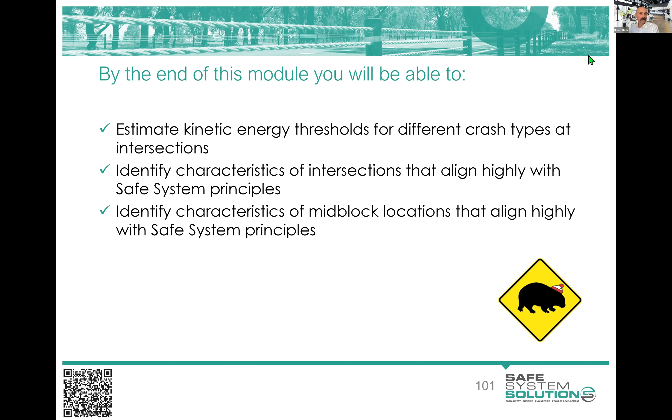The kinetic energy thresholds for different crash types, which we discussed. We started with the Usain Bolt analogy, which many are familiar with, and then we went a little bit further looking at different crash types. We're going to use that and dig further into it, and try to understand how we might make some assessments based on that. We'll do that for intersections, and for mid-block locations as well. So we'll really find out what aligns highly in the built environment for intersections and mid-blocks with safe system principles. Don't forget to count your wombats, of course.

Okay, so intersections are a really interesting, fascinating point on the road network, and they are a point of elevated risk. That's for a number of reasons. One, of course, is that we have conflict points. You can see here in our little picture we've got vehicles crashing. That's what a lot of people think of as an intersection crash, and certainly it is one. But we also have pedestrians who need to cross roads at this location, so we've got that conflict. We've got cyclists crossing and involved in those conflict points, motorcyclists as well.

We also have an increased run-off-road likelihood at these locations. Why is that? Because people will avoid or clip vehicles before they crash, so we have this increased turbulence at these areas of the road network, with people leaving the road to avoid a crash. And we also have a lot of fixed hazards around intersections. In this one you can see a signal pedestal, a fixed hazard, but we'll also often have power poles at intersections because the power line needs to turn, so you've got to have a pole there. Often culverts at intersections for drainage reasons. So we see a lot of roadside hazards at intersections.

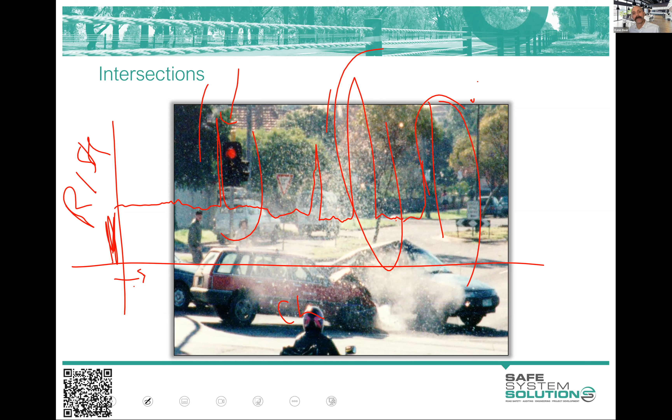So Monash University Accident Research Centre at one point tried to say, what are some high-level principles for good intersection design that align with safe system principles? I think it's worth thinking about this very high-level stuff first before we delve into specific detail. They started out with fewer vehicles and fewer intersections. Now, think about what we ended last session with, which was exposure times likelihood times severity or consequence, which is risk.

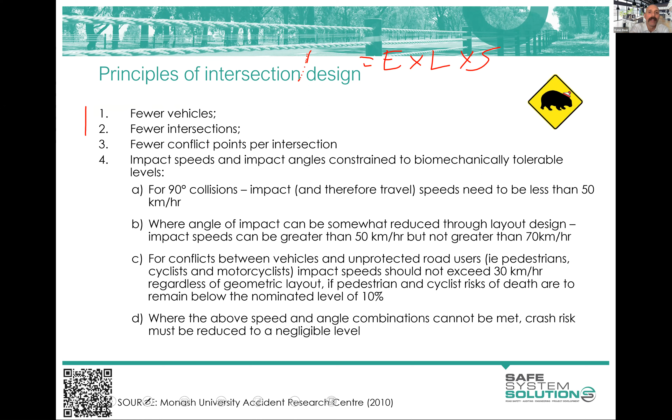These two are associated with exposure to crashes. If you eliminate an intersection, you've eliminated the exposure at that location. Now, yes, the vehicles might go to another intersection, so you may increase exposure there, but at that particular one we've eliminated the exposure. And fewer vehicles means less exposure under this exposure, likelihood, severity thinking.

Fewer conflict points per intersection. Now we're into likelihood. So a conflict point is just a way that you can crash. And I'll show a conflict point diagram. Some of you will know conflict point diagrams intimately, but it's just less possible ways to crash. Often people want to bring this in as an exposure reduction in a safe system assessment, but we put it to a likelihood reduction. I'll explain sort of why that is later.

Then we're into these impact speeds and angles for passenger vehicles, trying to get them inside those biomechanically tolerable levels. And so these ones, again, are in these generic ones of 90-degree crashes, 50 kilometers per hour or below. You can get a bit more angle on that.

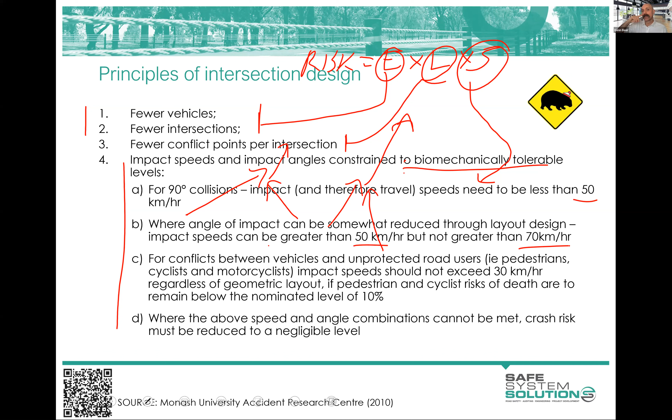So remember your year 11 vectors: if you've got a crash that happens like that, only a small amount of the energy goes into the environment. But if you crash like that, you push more energy into the environment, sort of bounce off a bit. So if we can get a bit more angle on our crashes, we can go somewhere between 50 and 70 kilometer per hour crashes within our tolerable levels.

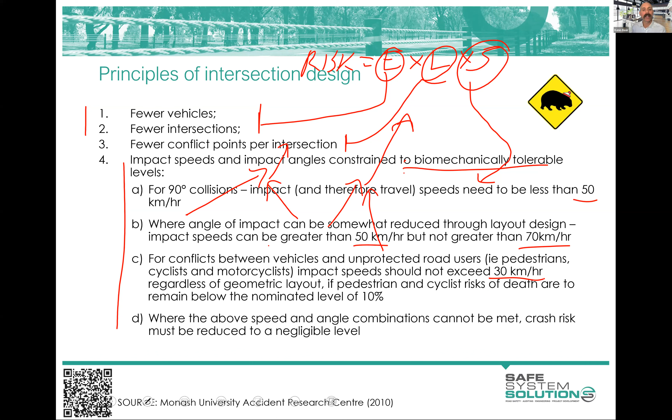Pedestrians and cyclists, thinking about them, we're into the 30 kilometers per hour or below. And if we can't be reaching these, we need to reevaluate how we're operating that area and see if we can make some fundamental changes.

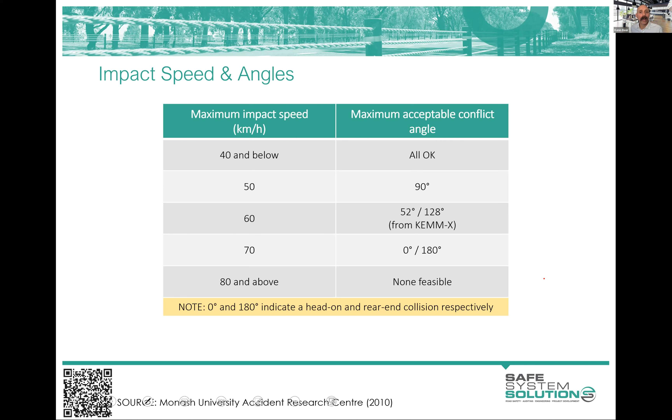Last session, I was showing quite a few of these impact speeds and angles for passenger vehicles mainly. And then we talked a little bit about pedestrians and cyclists and got some newer motorcycle data in there as well. So I won't spend too much time on that. But when you're doing a safe system assessment, you're going to be thinking about the angles of crash. Now, you don't need to be this precise, although your designers can easily spit out an angle if you want.

But for this, I'd be saying, okay, new intersection coming. Let's have a think about the angles. And I go, okay, a vehicle coming out here, being struck by a vehicle here, that's close enough to a right angle. So then I'd be thinking, well, what speed are we hoping that should be? We're thinking 50 kilometers per hour or below.

And they come out here. Okay, what about over here? And I'll say, oh, that angle, they've got more on it. I'd be more inclined to be thinking around the 60 kilometers per hour or below for that side, which would probably be within our general safe system tolerances.

So there are reasonably sophisticated tools you can use. There's one called KEMM-X, the kinetic energy management model, but that's far beyond what you would ever need to do for a safe system assessment. If you're doing some sort of very in-depth study of an intersection and forces and the like, you might dig out some of those tools to use.

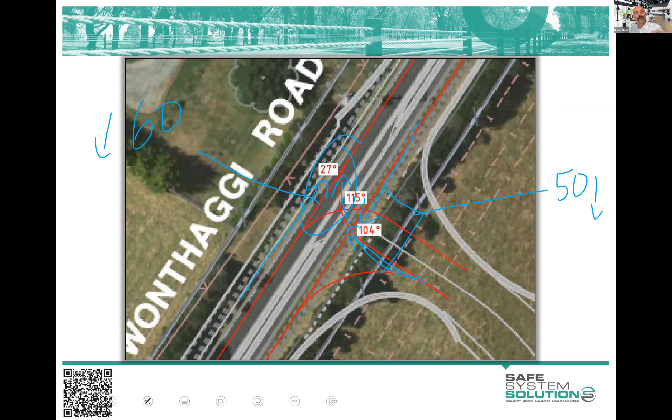But generally, because a safe system assessment is that risk assessment methodology, it's sort of broad brushish, you can simply make a judgment call on this based on: that's the angle, that's the speed, that's what we know from the science, and generally this is where we're going.

We also want to think about the secondary crashes, and I alluded to that with those run-off-road crash increases around intersections. So you have these vehicles avoiding crashes and running off the road. You have the two vehicles colliding and then they both leave the road, and you have secondary crashes.

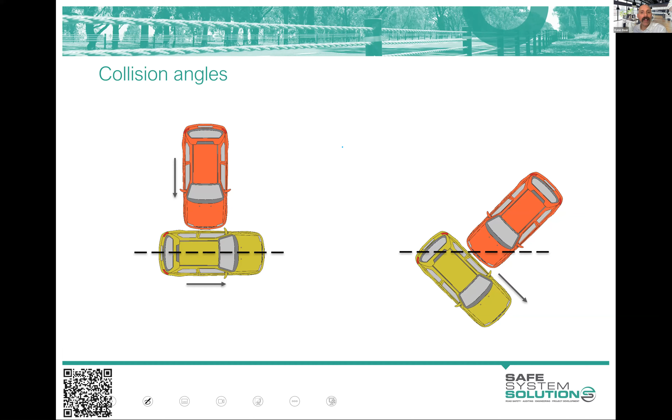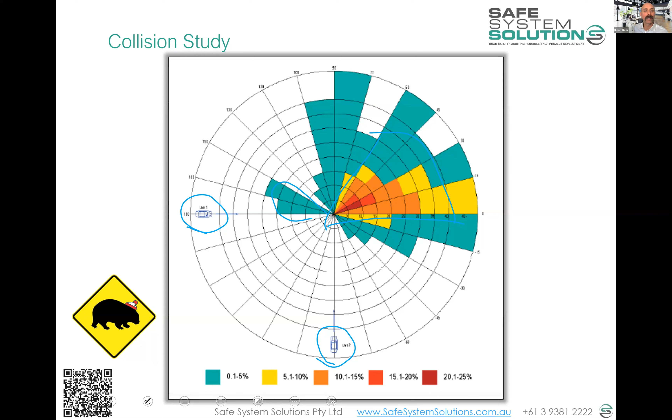So Kathy, I reckon that's enough talking out of me. Well, I'm going to give an introduction into this little exercise, and then I'm going to give people some time to do some thinking and come up with a few ideas.

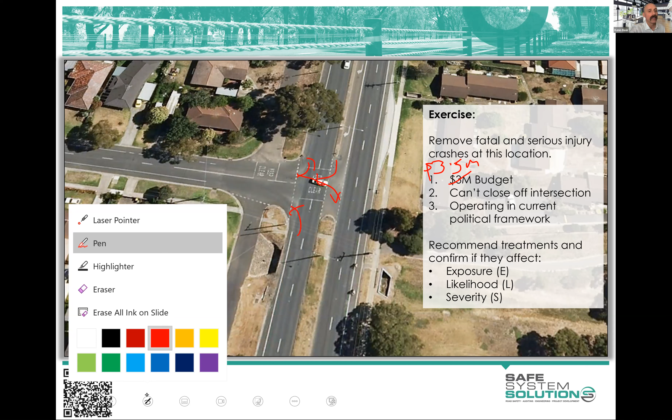What else? So you're operating also in your current political organizational framework. What do I mean by that? Well, if you're going to propose something extreme, you're going to have to give us a little bit of help here in getting that through the system. So some ideas on how we might work that through the system if you're going to something a bit extreme.

Now, some of you are probably going, well, I don't know how much things cost. How do I know what would 3.5 million get? Well, this is where I am going to assist as the instant cost estimator tool. So if you need a cost of something, just type it in and say cost. So you might say, how much for a grade separation flyover? And I would say $42 million. You're not going to afford it.

Amazing, Ken. You can do that instantly. Instant cost estimation. Jeez. Okay. Great. All right. Well, can I kick us off?

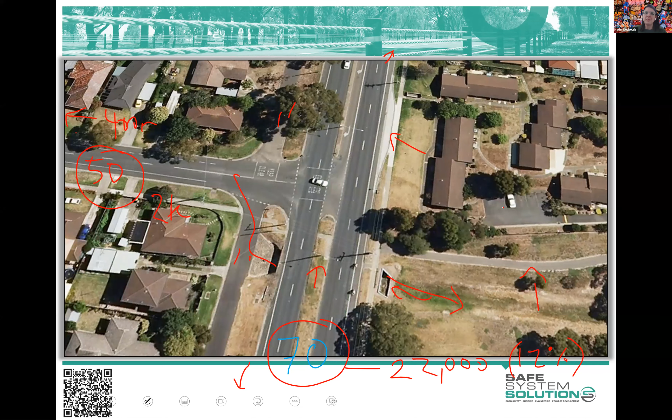So somebody wants to know what type of fatal and serious injury history. Interesting question. Okay. Wondered if anybody would ask that. So the crash history. Give a prize? Yeah. Okay, give a prize, because I'm up for prize giving.

I'm always a little bit hesitant to drive a lot of stuff by crash history. I mean, that's the way people have operated for a long time. These days, it's not a great predictor of future death and serious injury. But anyway, this one's got crashes involving vehicles crashing like that, and vehicles coming out and crashing like that. So that's our crash history, and I think there were six serious injury crashes, no fatals, all involving passenger vehicles, except one, which was a motorcyclist.

Okay, now just recapping, price for a roundabout, that was in the $7 or $8 million mark, is that right? Right. What about a price for a continuous footpath treatment on the service road? Continuous footpath treatment on the service road. So continuous footpath, I assume meaning like across there. Yeah, we'll do both. 40,000, 50,000. Drainage will work quite well there, so you don't need to do a huge amount.

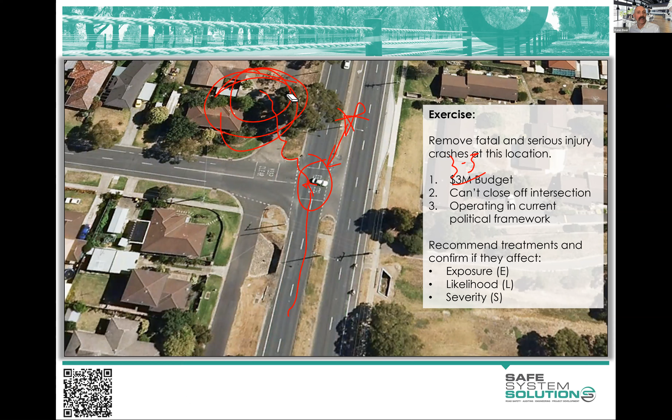All right, I think that's probably enough time, Kathy? Definitely. I'm just going to erase that. And I'm going to have a look at what we've got here when these wonderful people have come up with their ideas. Sorry, I'm jumping around the place here. Okay. Here we go.

So I like the fact that people very quickly were starting to ask, what's a roundabout cost? And people were quite interested in this roundabout idea, and I've got some slides to explore why maybe people were thinking about that. And we had lots of people thinking about different things, and then we started delving into, okay, let's go to the exposure, likelihood, and severity.

And we had some people asking, well, can we block off bits and pieces of this? Can we close the whole intersection? And I clarified, in this occasion, we can't, but that would definitely reduce the exposure to crashes. It would eliminate the exposure to crashes involving vehicles coming out and being struck. It wouldn't change our exposure to pedestrians crossing and being struck, because we'd have the same number of pedestrians crossing and essentially the same number of vehicles along here, but that intersection related crash would be down. So that is an exposure.

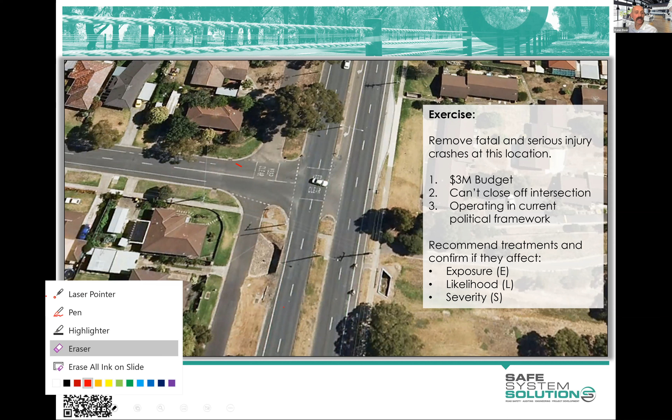So people wanting to close off the service roads, and then there's a little bit of confusion, it seems, as to what that helps us with. Does that help us with exposure or likelihood or severity? So really what we do, because of the relatively broad brush nature of safe system assessments, is say that would influence the likelihood of crashes. I think it would only be a very small reduction in the likelihood of crashes.

But nonetheless, the reason for that is that it's really not influencing the number of vehicles exposed to crashes at this location. That's predominantly done by the major volumes here and the major volumes here, and that's your crash. So coming out of here is going to cause a little bit of annoyance and turbulence and things here, but a minor number of increases in exposure to crashes, right?

So it might make things a little bit simpler, and that's all good. But all this is going to be happening at fairly low speeds, so I really don't have a huge amount of concern about that. It's when you've got vehicles coming through here at speed and things go wrong, that's our issue.

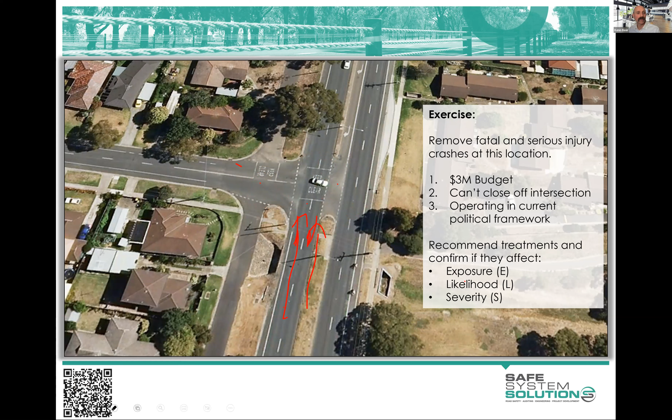Now, if you were to do a very, very refined safe system assessment, you could argue a change in exposure by closing their service roads. But essentially what you would have to do, and it would just be so weird for anybody to do this, but you technically could, is say, right, I'm actually doing all these different assessments. I'm doing an assessment here. So this will be assessment 1, this will be assessment 2, assessment 3, assessment 4, and assessment 5, 6 and 7.

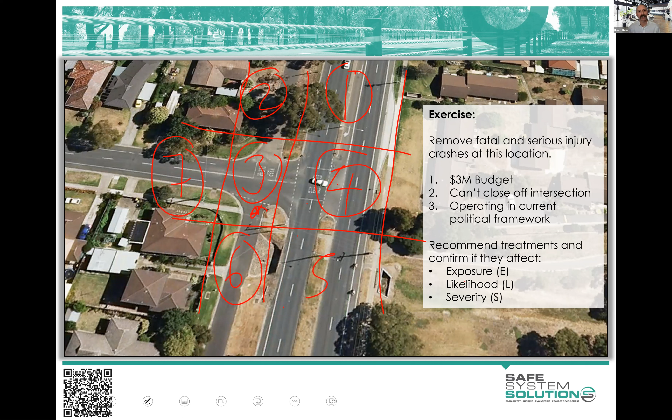And then you would say, well, for 3, we've changed the exposure to intersection crash types because they're at the intersection. But yeah, you wouldn't do that. It's just so much overkill for what we are doing with these assessments.

Okay, where were we? We were also seeing there, reduce the speed to 50 kilometers an hour. I'm not sure how we were going to do that. Speed limit reduction potentially for those doing it. And we've got some people now saying signalizing the intersection. A number of people have got to that point because they go, oh, we can't afford that roundabout we were thinking about. Okay, maybe we've got to go to signalization.

Now, some people want to move the bus stop. Okay, that's fine. So they're not liking the bus stop location close to this intersection, so maybe they're moving it down here potentially. And you do a bit of thinking about pedestrian desire lines, where people are coming from and going to, I'm sure, before you did that. But nonetheless, what would that influence? Exposure, likelihood, or severity? Well, that will influence likelihood.

You can't really say that this is going to influence the exposure to any crash type, because all the crashes that we were thinking about when the bus stop was here are still in our general vicinity. They're just happening down here. Be that a pedestrian crossing the road, be that the turbulence of the bus coming out and people going around it. So again, as long as we think, okay, our safe system assessment is of this whole area, that still exists.

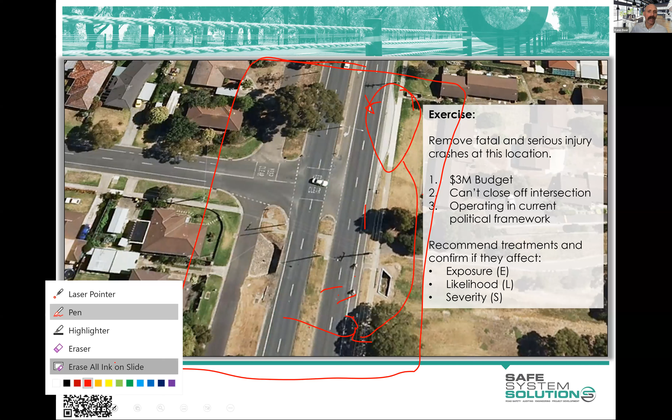Just having a look here. So then, interestingly, we've got some people talking about raised safety platforms and different raised intersections and raised bits and pieces. Now, that's interesting. So some people seem to want to raise things in this general area. And then we saw some people wanting to raise things out here as well. Okay, so that's quite interesting.

The reason I say that's quite interesting is because certainly 10 years ago, nobody ever would have been wanting to raise anything in that area. Why? Well, this is a fairly major arterial highway. It takes freight, buses, and you don't do vertical deflection on those, or that was the thinking. People would think about raising these threshold treatments and the like, and they have some advantage, but for that vehicle to vehicle crash type, really not too much advantage.

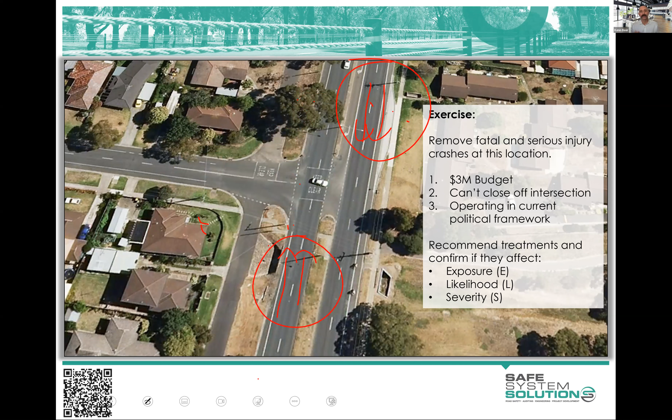They would have more advantage for pedestrians crossing at these locations, maybe slowing vehicles coming in, and certainly slowing vehicles coming out. But at a T intersection like this, the vehicles on the side road, well, they're not really the bullet vehicles, are they? They're not the ones doing damage. These vehicles are doing the damage. So they're the ones where we should be trying to address the speed to get it within what we're thinking about as tolerable levels for the crash types we're particularly focused on.

I'm just reading through, seeing there's lots of great responses, and I'm not going to get through them all. And I think we have to give a shout out to Anthony because he's detailed everything, including the cost for everything, and given us a total. And it's a bill of quantities at the end. Yes, yeah.

Good, excellent. Tell us, though, there are still many people in the industry that do not believe in devices such as platforms on major arterial roads. That's considered LATM, local area traffic management, to them. Yes, that's a very good point.

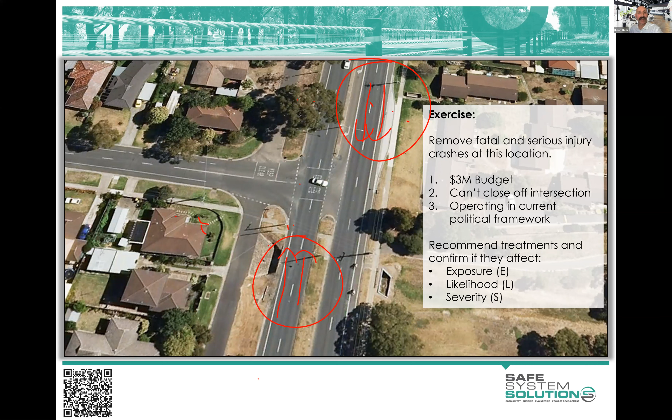That deserves a prize. And we're trying very hard to continue to get people educated and thinking, and there are lots and lots of examples out there of where it's been done and it can be done, and it's not the end of the world. And it's big change. Like, as I say, if I was in my VicRoads office 10 years ago and said, hey, why don't we do a raised intersection through here? I would have been kicked out of the office for sure, or laughed out of the office. But we're progressing now, but some areas are slower to progress.

But how do you get big change to happen? You show lots of examples, you show it can be done, you do trial areas and trial sites, and you move things forward. But let's have a look at some of this. And I suppose the other thing is that I've been running this course for a long time, about 7 or 8 years on safe system assessments, and nobody was interested in it for the first 5 years.

And we did these sorts of exercises though, we would get a group together and do these sorts of exercises. And with a group like this, I'd never get anybody who would say raised intersection. But now I get a good amount of people in every course suggesting that. And it shows that industry is getting progress. We're getting that thinking. People are understanding these things.

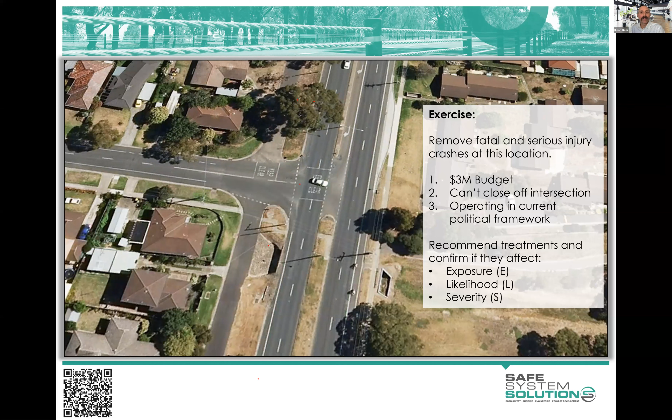And with a safe system assessment, you're starting to push people who don't have that thinking with these defined, somewhat official looking assessments. I'll talk more to that as well. But I'm going to run through a few slides, and I'm going to refer back to that intersection, and we'll come back to it a little bit later. But a lot of people did come to the conclusion that signalization, with the dollars we had available, was probably going to be what was needed of some description.

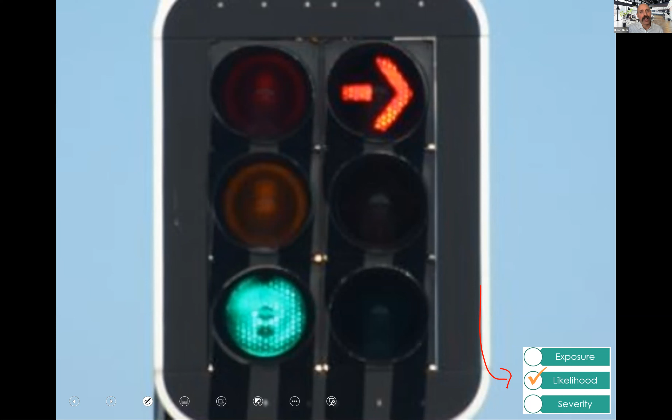And signals influence the likelihood of crashes. When we're doing safe system assessment, anything signalizing will influence the likelihood of crashes. Now, you probably have scenarios conjured up in your mind of where signals will reduce the severity of crashes as well. And yeah, for some crashes the severity will be reduced. Somebody will be braking late and it'll be a lower impact crash. But we are thinking about what is more likely to still remain, and that's high speed crashes of people running red lights and going through these signals.

The top 100 intersections for death and serious injury in most states will be absolutely dominated by large signalized intersections. And people just go, well, there's nothing more we can do here. People just have to stop running the red lights. This is now a behavioral issue, not our issue in the engineering of it. We've done our job. We've got to challenge that. We really have to challenge that.

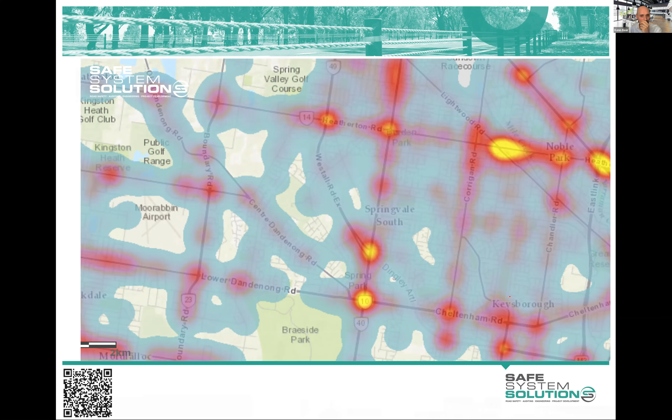In fact, Kathy, I'll show the next slide or two, and then I'm going to dig something out of my archive, which is a bit more inflammatory, the way I used to try to do it. And now we've got safe system assessments, but roundabouts.

Oh, sorry, Kathy, go. No, that's okay. Did you win many friends and influence people that way? Or? Yeah, no, Dale Carnegie would be angry at me, in my approach.

Okay, but roundabouts, I like the fact that a lot of people came at roundabouts at an early stage in that example we had, because roundabouts address the severity of crashes for passenger vehicles, right? Actually, severity of crashes for all crash types, but we have some other challenges with pedestrians and cyclists at roundabouts, which Max McArdle is going to talk to you about next session in a bit of detail. But for passenger vehicle crashes, the severity of crash is significantly down.

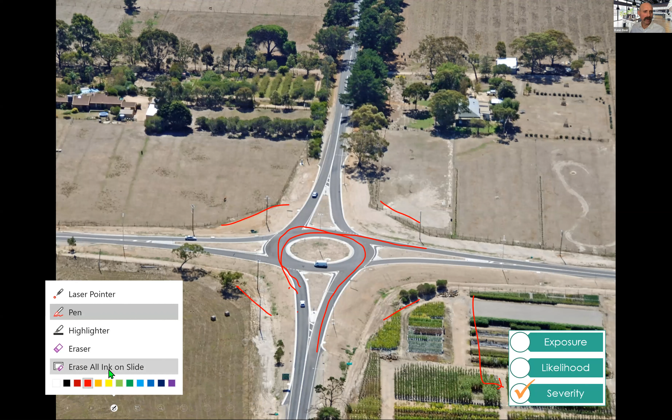There's some challenges also apart from the size when we are thinking about traffic and roundabouts. Unbalanced flow becomes a little problematic with roundabouts. You get one leg will dominate. It'll cause other challenges. I often challenge that one though and say to people, don't throw the baby out with the bathwater there. We can meter roundabouts. Metering a roundabout is to add a set of traffic signals.

So, for example, we could put a set of traffic signals here and a loop in the road back here. And as the vehicles queue up and we recognize somebody's queuing all the way back to there, we go, okay, we're going to stop vehicles here and we let them sort of flush out. An easy way to meter is to just have that stop there, so all these vehicles can come out.

Depending on how you've worked it out, if you can make this a signalized crossing point, I love that. And you can get a nice shared path that comes in here and you've got a nice crossing and these sort of things. But you play around with them. So you can really extend the life of roundabouts if you're thinking about them from that pure traffic perspective.

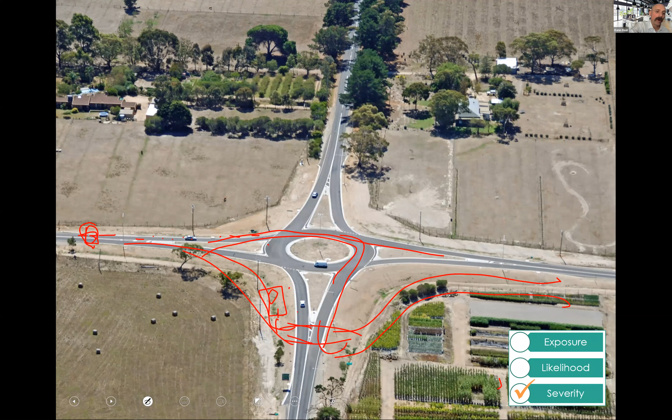And this is often what happens: the traffic engineers and traffic modelers look at all these outer suburban areas and they're congested with cars. And that's a bigger issue in its own right, why is everybody having to drive a car in these areas? I'm putting that strategic planning part aside, lots of work to be done in that space. But the easy ways to get congestion down are duplicating roads and removing roundabouts and replacing those roundabouts with traffic signals. It'll make the network flow a bit better.

Now, it's interesting. I was in the road safety department in a state government authority, and there was a big, massive, Australia's biggest ever, this is back in the day, congestion easing program that was coming along, throwing heaps of money at it. It was called Keep Melbourne Moving at the time. And this is where I was going to share something else, Kathy. I was going to show you something that I did take when I left a while back.

Because what was happening was the modeling showed that, okay, if we rip all these roundabouts out and replace them with traffic signals, we're going to get a little bit more easing of congestion during peak times for cars. And they then designed those up and sent them to the road safety department and others. And we were to do a safety review on it, sort of like an audit. Well, it was a desktop review, not an actual road safety audit.

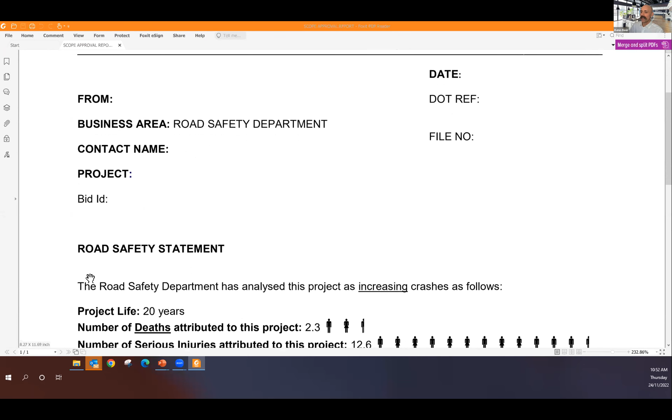Okay. The road safety department has analysed this project as increasing crashes as follows. The project life, you've got to put a life on these projects to do analysis. Number of deaths attributed to the project, 2.3. And we had some little pictures of people to remind them they were going to kill people. Serious injuries attributed to this project, 12.6.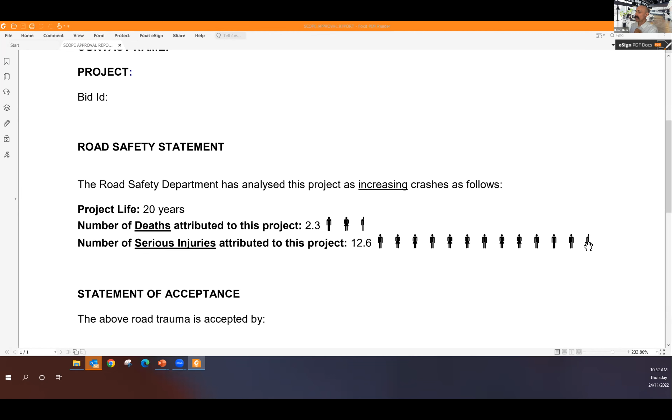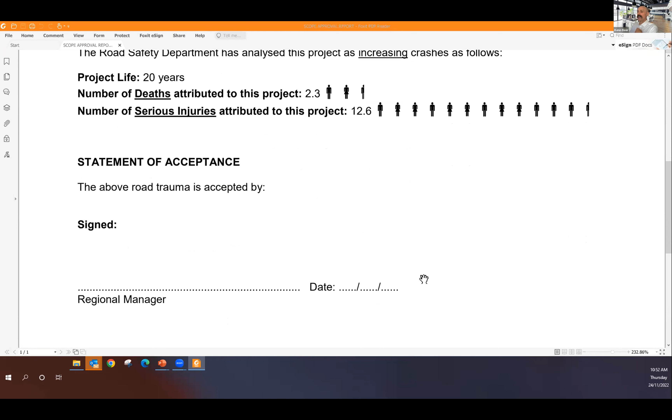And then, yeah, this bit, statement of acceptance. The above road trauma is accepted by regional manager. So that was the covering memo with the safety assessment report that we used to send back until we got a call to go and visit the chief executive, very nice chief executive, actually, who just gave us that nice talk about the responsibility of a road authority being very complex, with many competing demands and blah, blah, blah. And we know that.

We're trying to make a point here that somebody needs to stand up and say we value getting a few more seconds per vehicle more than protecting our community. And anyway, so we had to stop doing that. Did you get any signed? No, of course not. But what it did do, I suppose, was rile up some good discussion and some good questioning.

The reason I said that, that's an inflammatory way of doing things, a safe system assessment kind of does that, but in an approach that's not so inflammatory, with graphs, and it looks very sort of scientific. Mind you, the way we did that was probably more scientific than the way safe system assessments are done. Safe system assessments have a bit more subjectivity to them, a bit more professional judgment style stuff. That one, we used some predictive modeling of crashes, which still has subjectivity.

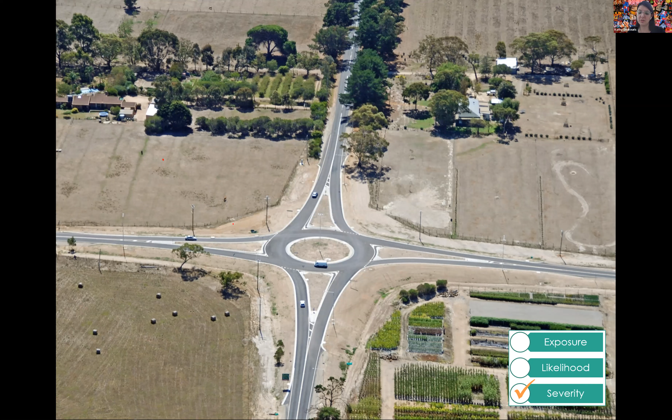Okay, all right. So you've left us feeling down now. We need to have a break soon. Let me finish some roundabout stuff, because I can do this pretty quickly.

Great. I also question why roundabouts need to be as big as they are. Now, don't get me wrong, very different road environment here, but this is a UK example. And what we actually see is really significant benefit from these sorts of roundabouts. But the reasoning why is slightly different to what people think. When people talk about roundabouts, they're always on about deflection and these sorts of things. And that's very beneficial, I agree. It slows you down.

But don't forget, you get huge benefit because nobody approaching this thinks they have ultimate priority. And that's a good thing at an area of high risk, that they will slow down, look around and be more alert. So this is kind of the UK equivalent of the four-way stop scenario. And I think we should recognize that benefit in its own right.

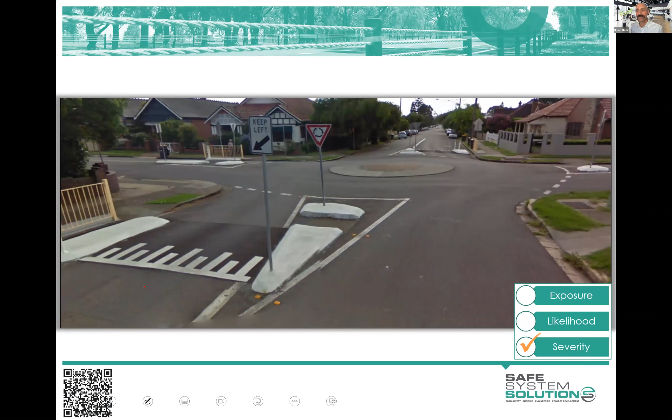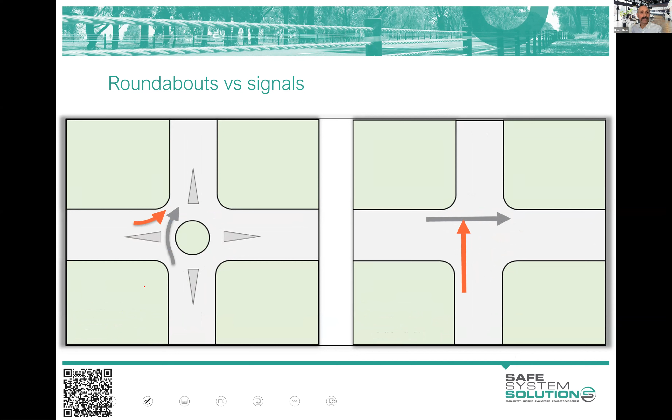And the other one is a bit subtler, but it's really interesting: when people approach an intersection, they are in all states of consciousness. We would love them to be alert and awake and really concentrating, but a lot of them are not. They've worked a double shift, or they're thinking about the fight they had with their partner, or they're daydreaming about something else. Maybe they've had a few drinks. We want them to be alert and compliant and sober, but the reality is so many are not.

But if we have a lump of infrastructure in the middle of the road that they have to interact with, they come back to reality. They look around, they slow down. A set of traffic signals doesn't do that. The straightness of the road geometry, the nothingness of it, means some people don't come out of their daze and they go straight through at speed. Some of you will have driven in this state, no doubt, and you don't remember the last 5 minutes of driving, or you went, oh, did I just go through a red light? That's a lot of people doing that. But that physical infrastructure can alert people at those points that we know spike in risk.

And there are lots of different roundabout options. I like the fact that people have been delving into lots of detail about double lane roundabouts and single lane roundabouts. That would have had to be a double lane roundabout. We have this possible issue of higher speed through it. So you can see here some interesting speed versus radius, and double lane roundabouts can have very high speed through them. Speed is a good proxy for safety, always.

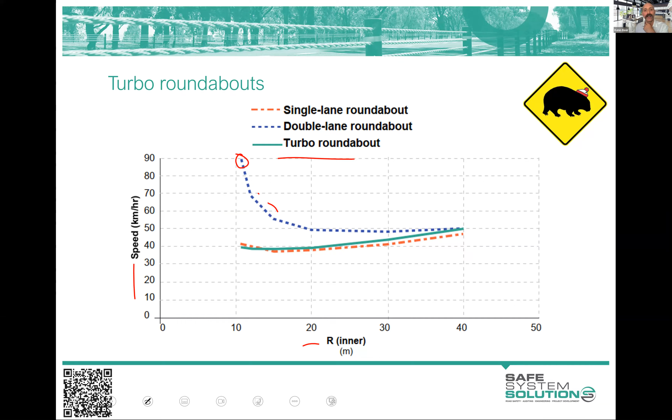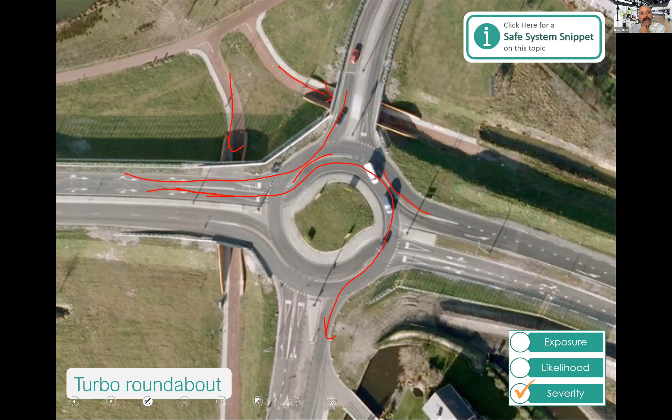If a truck had made a mistake on a large signalized intersection or the like, we would see high speed and high severity. Interesting, very radial roundabout here, isn't it? So that's an interesting one for those who like roundabout design. Not that sort of tangential one.

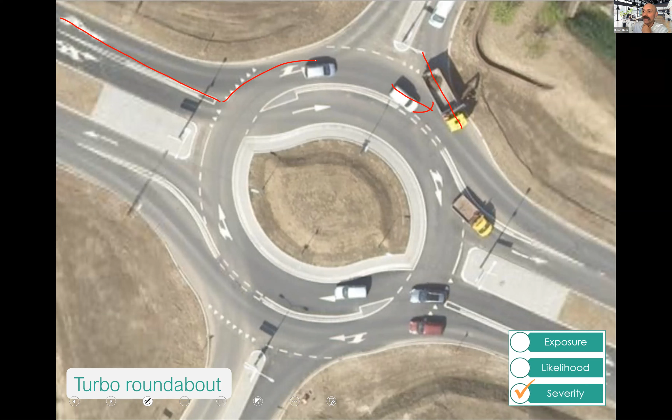And we'll have a break after I show you this one, which I think is cool. But why am I showing this? Well, it's more just a philosophy, a different way of looking at things, because this is in the Netherlands, and flipped it over because they drive on the right, and that would just boggle our minds beyond repair. I've not driven this or walked this or ridden this, but I think it would not be as bad as it looks from up here.

But the thing is, we brought a Dutch engineer out to talk about roundabout design for cyclists and do lots of bits and pieces. I showed this one, I said, I find this amazing because, in Australia, just the land take on this and the complexity, in Australia it would just be a large signalized intersection. It might have got to grade separation at some point, but probably a large signalized intersection, high-speed roads.

And the Dutch engineer just went, but what about all the death and serious injury? Like, how could you do that? Couldn't fathom that you would kill and seriously injure your community like that. I'm like, yeah, I agree. And they would rather this sort of setup. Well, it's not even rather. There's no consideration that you could operate a signalized intersection at the speeds we operate them at. Anyway, I think it's an interesting one there.

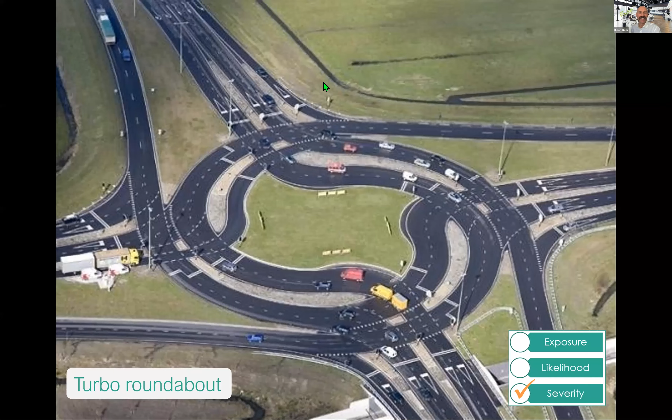Well, I do like the fact that people are out there now challenging big signalized intersection design and saying, well, what can we do to give us some of those safe system aligned principles to really start to address the severity of crash? I'd give this one probably likelihood as well because of the signalization. But these sorts of things, slowing vehicles on the approach, changing the angle, disrupting the dazed asleep driving mentality.

Now this is just a mock-up, but people are trying to look at how can we do this? How can we make this somewhat safer? So that's a cut through roundabout. But raised safety platforms, we already had a good bit of discussion about this, so I don't need to go on about it too much. These are now becoming a more commonplace practice on major arterial roads in Australia and New Zealand. We've got a lot of work to do in some jurisdictions, and people are reluctant because it's different, it's new, it's a change.

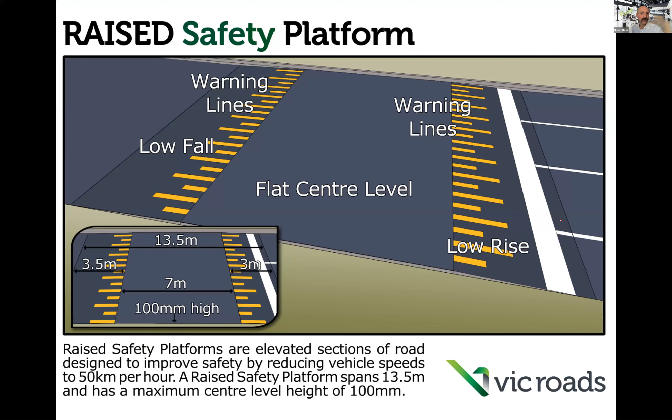But that one is one where they ended up doing what I hope more people will do and saying, well, if we just build another set of signals, we're probably going to have to accept some death and serious injury that's going to come with it, because we know that's what happens. But we're going to need to change it up. What else can we do? How can we slow down the bullet vehicles?

And the bullet vehicles are going to be these ones, aren't they? Or these ones coming in. The ones coming out here or going in here, they don't have the speed, so you don't need to disrupt them. And so they went with raised platforms on the approach, signalization because of the costs, to get some slightly better pedestrian access, to get some better cyclists crossing from the shared path and a few other bits and pieces.

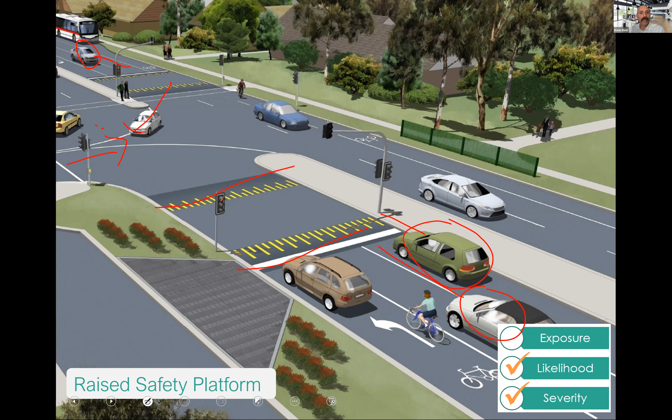It all fitted together nicely, consistency of treatment. And so that one was built. Now they went with 50 km/h advisory speeds. So the ramp grades are not like an urban speed hump, right? They're just trying to bring those speeds down a bit. Now that's not getting us within tolerable limits for the pedestrians and the cyclists.

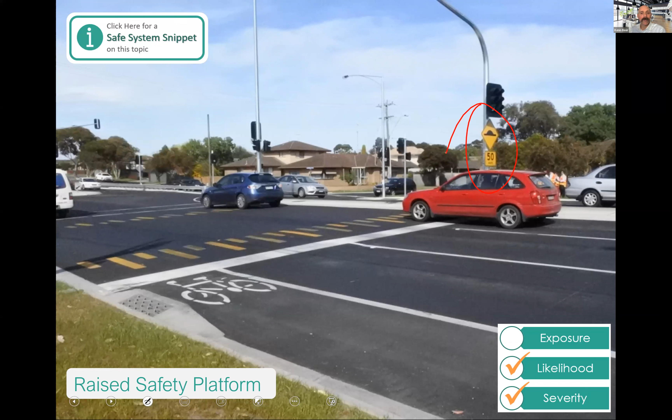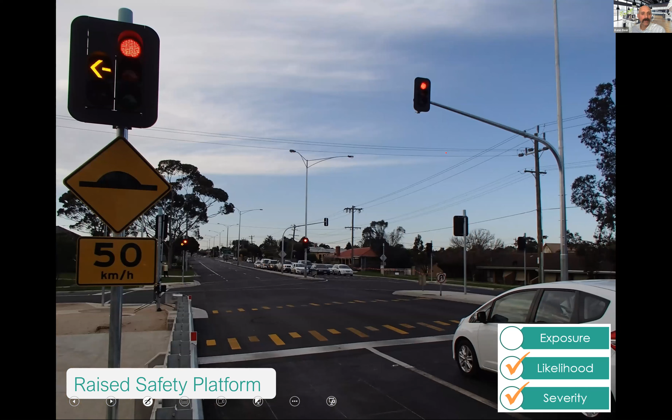They'd made that sort of determination that the major concern they had was vehicle-to-vehicle crashes. This is a major traffic route and all those other things. But I think that what they ended up doing was really quite impressive. So this is Surf Coast Highway, Kidman Avenue. This was the first sort of one. I was out there with a colleague doing the post-opening road safety audit on it and looking at bits and pieces.

I took this photo, and I really like this photo because we've got a vehicle braking on the approach to a green light. And that shows that we're disrupting people's monotonous driving, half asleepness. Sometimes I've shown this to different groups and the like, and some traffic ops people get angry.

Oh, this is so annoying and inefficient, and for a very small percentage of people, we're impacting on everybody and the like. It's ridiculous. If we'd put a roundabout in there, everybody would be slowing down. I mean, nobody would be making that sort of comment, would they? It's just that we're not used to doing this for traffic signals. So we try and disrupt that and challenge that.

Another sort of spin-off advantage is the reduction in the dilemma zone. So the dilemma zone is that point in time and space where the driver's in a dilemma as to, do they put the foot down to go through the orange light or do they brake? I'm sure you've found yourself in the dilemma zone. What another great naming by whoever named that. The official name is a dilemma zone.

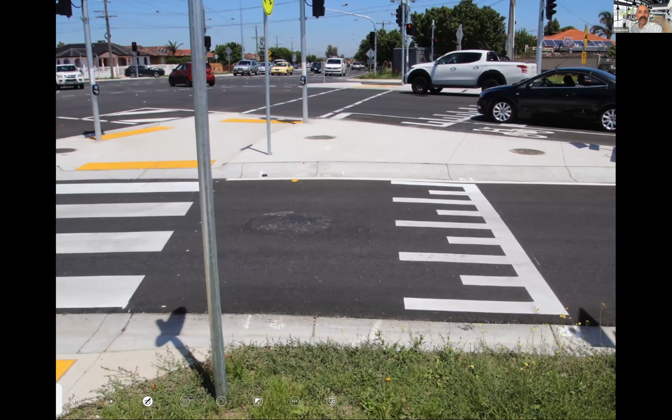But the dilemma zone just absolutely shrinks with the presence of that raised platform, because people aren't going to put the foot down to go over it. So wonderful, other spin-off advantages. Now, there have been some independent evaluations of these raised safety platforms done now. So ARRB did one. We've had some stuff out of New Zealand now. There's an Austroads document. They're all showing wonderful benefits, not just for the passenger vehicles, but pedestrians and cyclists. Everybody's benefiting. And we're seeing them getting more and more rolled out.

But this case study, this little one here, I say little one, is fantastic. And okay, there's some little design tweaks I'd like done. I'd like that much lower and sharper there. But anyway, that's okay. And then the construction and how they did it. But the reason I love this is Dalton Childs Road. This was a roundabout. And guess what happened? Another congestion easing program. Big congestion, rip the roundabouts out, replace them with traffic signals.

So we know, 15 years later or whatever it is. But guess what they all had to do? Safe system assessments. Right? And guess what the safe system assessment said? You're going to make things worse by doing this in terms of safe system alignment. And we suggest you think about slowing vehicle speeds through this intersection. And so they created a raised platform, slowed everybody down.

This is not a minor road. Dalton Road carries at least 55,000 vehicles a day. Major bus route, heavy vehicle route. It's where the emergency services go up and down. And now there's at least 3 signalized intersections in a row that are raised. Okay, we're starting to see this. Yeah, we slow people down at conflict points to within tolerable limits, or very close to it.

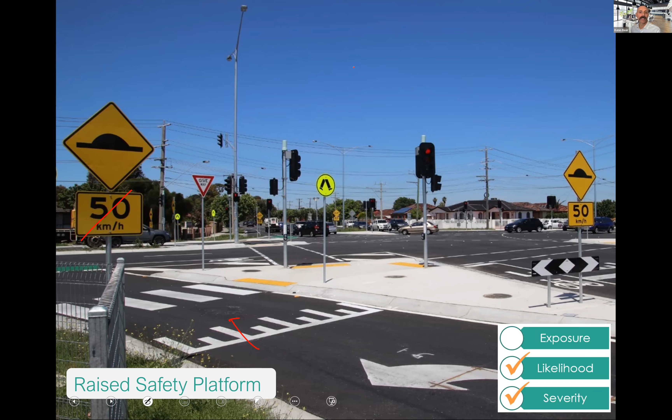So progress comes along. It can be slow. It can be frustrating. But the more things we have, like these safe system assessments to put down to challenge, we can get some traction. And in terms of things like guidance, okay, we're seeing better guidance now. Victoria's got raised safety platform guidance.

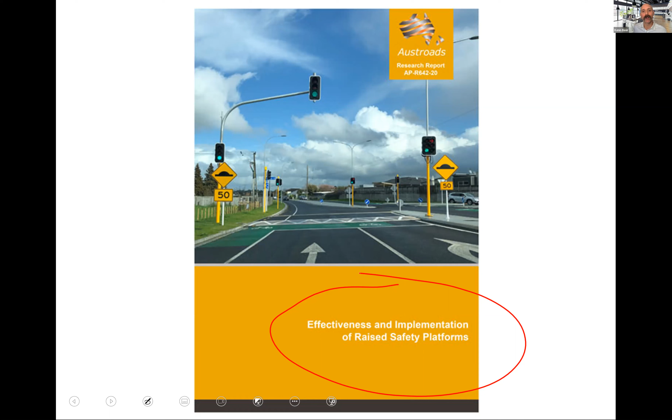We've got this Austroads report, and that's quite a good one. We've got lots of examples there, as I showed you. I think there's about 15 across outer metropolitan Melbourne, and some now in regional Victoria. We're seeing New Zealand's done 2 or 3 now, and more to come. We've got South Australia's got a couple of things that are sort of in the realm of what we're talking about, and a few other states lagging a little bit on starting the ball rolling and trialing them, but we hope to see that happening.

Any questions or comments on that? I think what usually happens is we get people who come to this course who are safety champions and the like, and they're all supportive of this and frustrated that they can't quite convince some people to make this happen. But I empathize and encourage.

Okay, so tell us, does Dalton Road still have its 70-kilometre-an-hour limit? Dalton 60, I think. So yeah, 60 or 70. No, 60, I think, at that location. And Phil's on there. Yeah, Childs Road's about 25,000. Yeah. They're big roads. They were really pumping traffic through.

So are there any limitations to raised safety platforms, heavy vehicle use, visibility? So yeah, there's some design specifics. I think that Austroads report's done a great job of condensing that alongside some of those VicRoads supplements. Yeah, that's good. Actually, Phil's given them the thumbs up for trucks, and he's the truck guru.

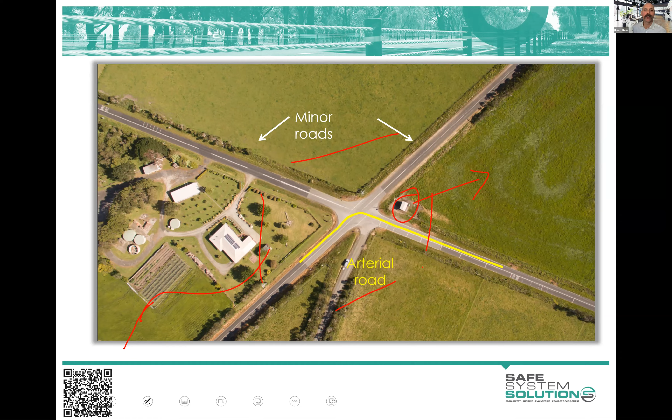And again, the safe system assessment said, okay, in this case you will improve things in terms of reducing the likelihood of crashes. You're doing nothing for the severity of crashes, and you can do a whole lot more here. And so they went back to the drawing board. And this is where they came to the point of saying, well, we want a roundabout. What about a smaller roundabout?

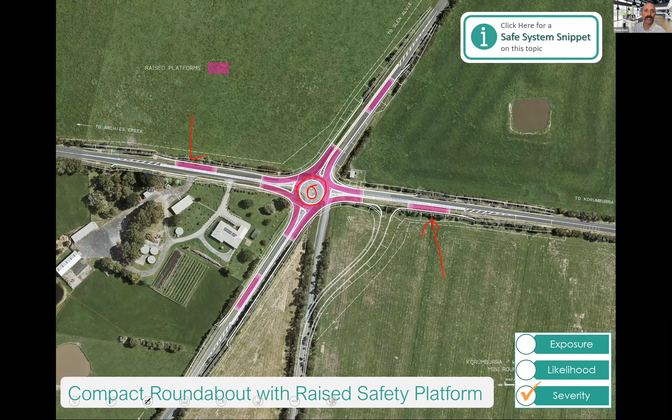And you can see here, the roundabout itself is actually just that little circle. And that's a concrete apron and some speed calming devices to slow vehicles on the approach. So that one is the Lance Creek compact roundabout. And you can see some raised platforms, a bit of a raise there. That's to supplement the reverse curve speed calming on the approach to the roundabout.

You've got a little roundabout, so a large vehicle can track over that, but hopefully smaller vehicles will go around it. I can send you the detailed designs on this. And I did a conference paper on it because we've written some compact roundabout design notes for the Victorian government. Actually, that's publicly available now.

So how do you design these? How do you think about it? Lots of little tricks around designing these. But this is not about the details of designing this. It's the principle that right turn lanes and warning signs are okay to reduce the chance of a crash, but we need to fundamentally address the severity of incidents, slow vehicles down at these conflict points. And here's another good example of innovation and pushing and trying to change things.

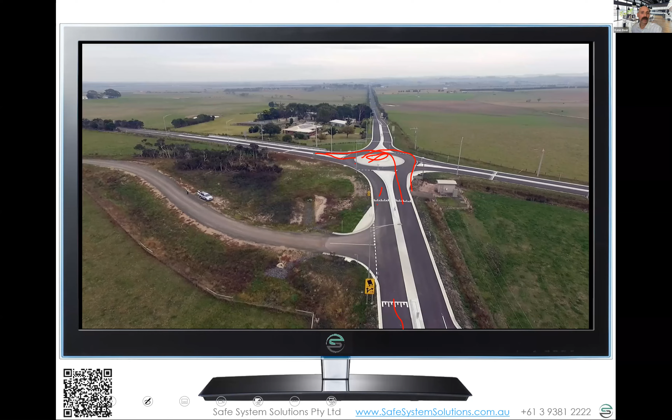Quick quiz, Kathy, and then we're going to give people a little assignment at the end of today, aren't we? You certainly are. You don't go away from this just happily listening and writing in the comments. So the quiz that's popped up should say, true or false, traffic signals are not safe system. True, false, or unintelligible question. Maybe that's questioning your questions there, Ken. Yeah, it's saying, what do you even mean by this question? Let people ponder that.

Actually, people are giving me a lot of homework to do after this session. Lots of things to pop into the learning management system. Untreated traffic signals are not safe system. Ooh, untreated. Yeah, okay. Well, this is interesting, isn't it? We can see the results as they're coming in, and we'll share them with everybody. I think I'll do that now. Okay, this is what we had.

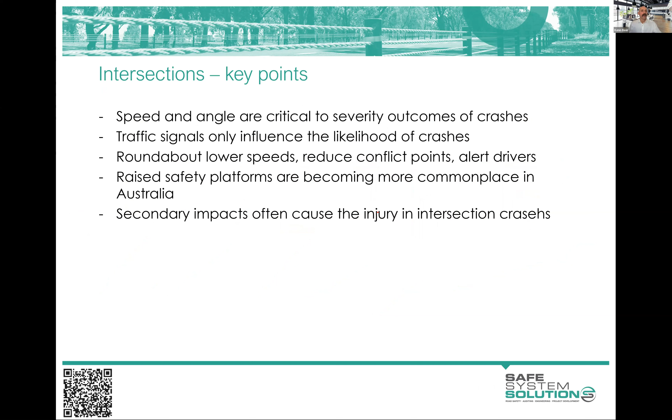A few key takeaway points in the notes if you want a written summary. Lane departure crash is interesting. Maybe just type in the chat. Here's a road, 100 km/h. It's got some sealed shoulders, a center line, and a very occasional minor intersection, and it goes on for about 400 kilometers like this. It's pretty much straight. What crashes are we going to see here? You're asking people to type something in? Yeah, okay, great. Maybe about 3,000, 4,000 vehicles a day.

Oh. Okay. Yep. That's right. Everybody's on it.

Head-ons and run-off road crashes, and people indicating what might have generated this: mainly people falling asleep, being distracted, drifting in and out of their lanes and leaving the road. And we see a lot of it. To pick an individual spot on these types of roads as significantly riskier than other parts is near impossible. We see this distributed out along these roads.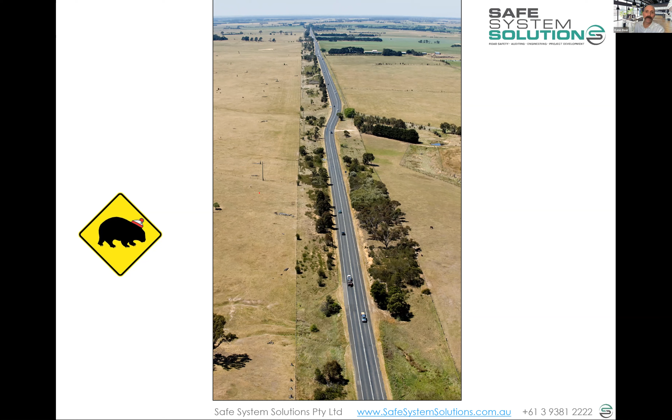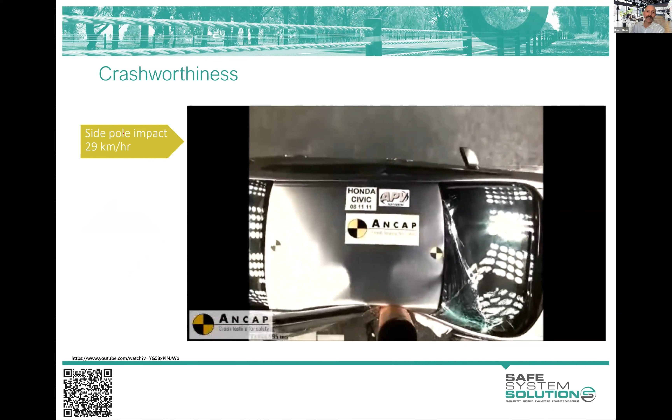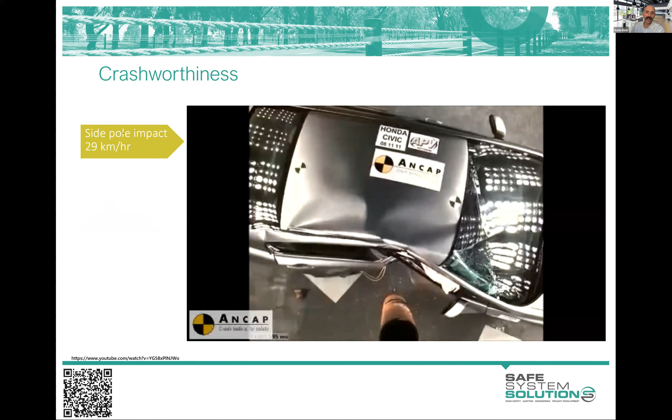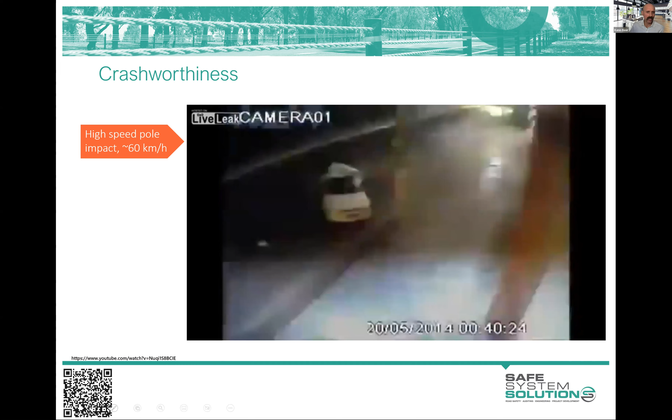We saw that 29 kilometre, now 32 kilometre per hour side impact pole test. We know that as a vehicle's yawing and sliding through the roadside, if it finds a point source hazard, a tree, a power pole, or the like, there's going to be so much force imparted. Here's an example, and this is a bit graphic, so turn away if you need: this is a predicted 60 kilometre per hour strike with a power pole. This shows you the violence, the huge energies we're talking about. You're not able to withstand that sort of a crash.

So clearing roadsides of fixed hazards, power poles, trees, culverts, and the like, reduces risk, but there's a limitation to that. You can see how this asymptotes out around 4.5 casualty crashes per 100 million VKTs.

Prize if you can tell me what VKT stands for, first person to do that.

So we see that cleared areas in the roadside are better, but there's some interesting practical challenges with that.

So whoever said vehicle kilometres travelled first is correct. Kathy will work that out and give a prize.

So the other point around this idea of clear zone is that we don't want to create clear zones anymore. People did in the past. Maybe people still want to, but the removal of vegetation and trees is just not what we want to do. Back in the day, that was the best thing we had, but now in a lot of cases we have better options. So clear zone theory has been taken out of Austroads' guides. If you look now at the Austroads Guide to Road Design, Part 6, it does not include clear zones.

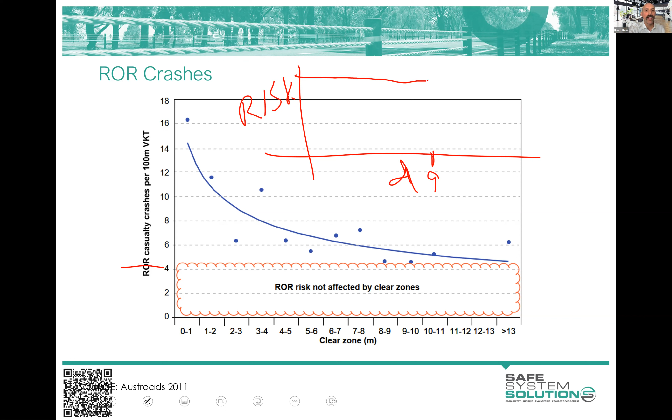So what we ended up seeing was all these trees and power poles at 9.1 metres. You'd see brand new roads built and everything sitting at 9. It was like, oh no, it's 8.9, we couldn't possibly do that. 9.1, fine, not a hazard. So that eventually got moved out. Plus, it was based off 1960s research, with lots of questions around that.

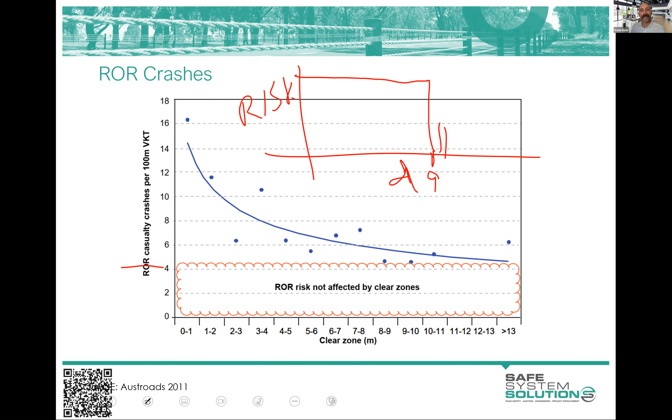So where we're at is that we know wide clear zones are not necessarily a safe place to be. You probably get your most benefit around 4 to 5 metres, but you've got to consider that the world we live in now is not one where clearing all your vegetation is appropriate.

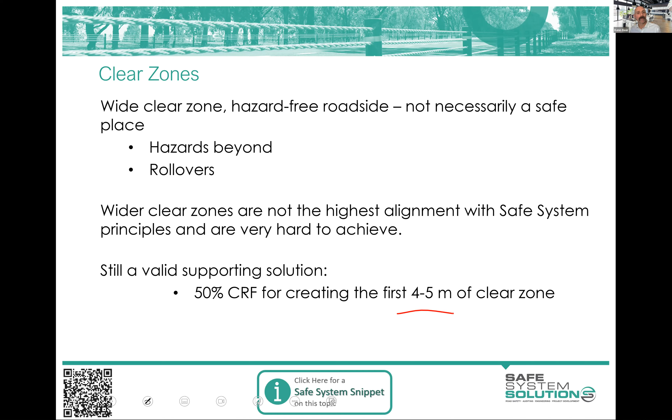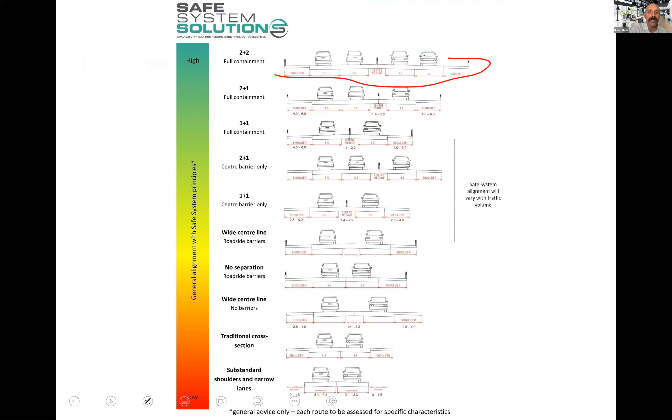The new Part 6 has got some interesting ways of doing it. Lots of good stuff in there. Still some things we need to keep working on. But it just sort of simplified the whole idea that continuous barrier systems are our highest alignment with safe system principles. People will leave the road. They will leave their lane. And we need something there to manage the energy.

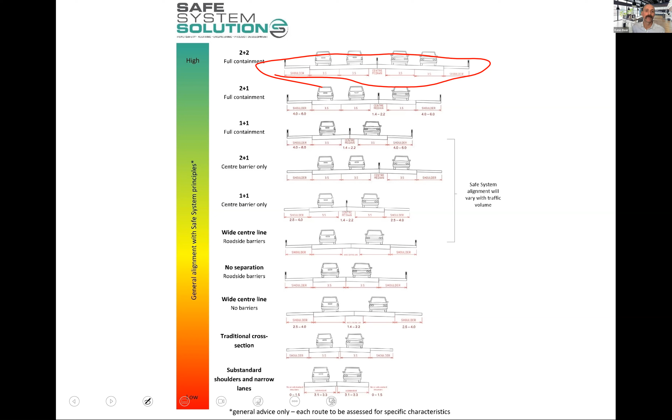And it's interesting when you look at different road cross sections and star rate them. The same way you star rate the fridge for energy ratings, you can star rate roads for safety. Bit hard to see, but that's a 4-star road with this big cleared area. Barrier systems, barrier systems, barrier systems, that's a 5-star road.

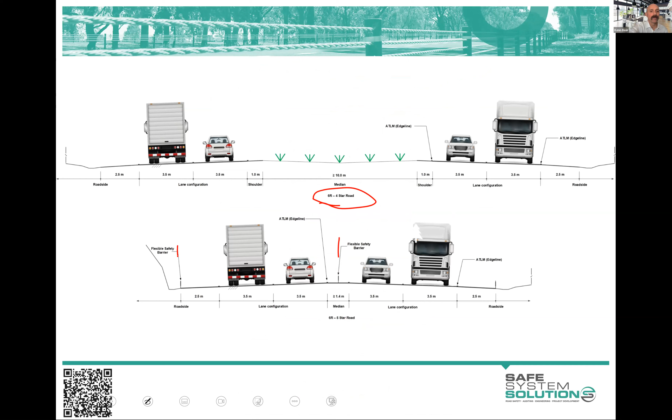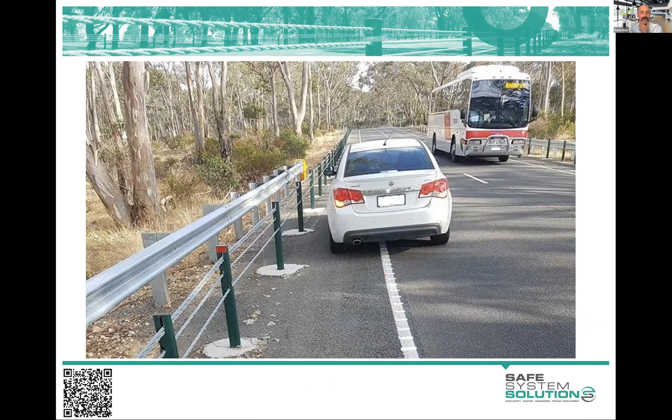Anyway, I won't go through each of those. How we do it, the specifics of the design, thinking about vehicle breakdown, all important stuff to do. We need to ensure we can get this out. There's good design information out there now on how to do all of this stuff. I want to finish on this one. And again, I'm not talking about the specifics of the product. I will talk about the product, but I want to talk about the principles. And the principle is thinking about energy and energy management in our designs and doing more of that.

So this is an old Ford, and it's that classic scenario that we all get frustrated about, which is 4 young males at 2 a.m. going at high speeds. It was a roundabout in this instance. I've just talked about how good roundabouts are, slowing people down. They went through intentionally fast, whereas probably any other vehicles, I don't think there would have been too many around, would have been slowing down. But they left the road. They hit the power pole,

and the power pole had a thing called a Raptor cushion around it. That's a Raptor. And the Raptor is not connected to it. It sits around it. And it does a few things. It certainly absorbs energy like a cushion, but it also rotates. And the idea is that it can rotate and redirect some of the energy, so push the vehicle away a bit. It's about thinking, how do we manage energy as well as we can? Barrier systems are the best at it, but people are thinking about this and trying other things and working out how we can manage the severity of incidents.

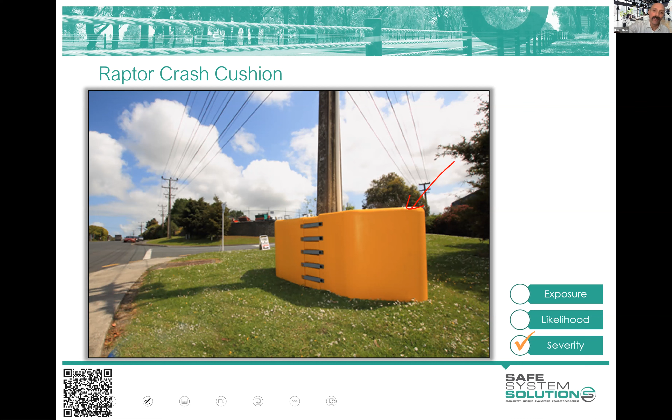And all those people survived, minor injuries at the worst. They're all, I assume, living healthy lives now. But certainly that incident didn't kill them, didn't leave them with lifelong debilitating injuries, even though the forensic report said that they hit it somewhere around 90 kilometers per hour, which, if you think back to that video I showed you of around 60 kilometers, it's just unbelievable that they survived. And the Raptor is distributing energy, redirecting energy, and cushioning and absorbing energy all at once. It's certainly played a role in what is a car with very minimal safety features.

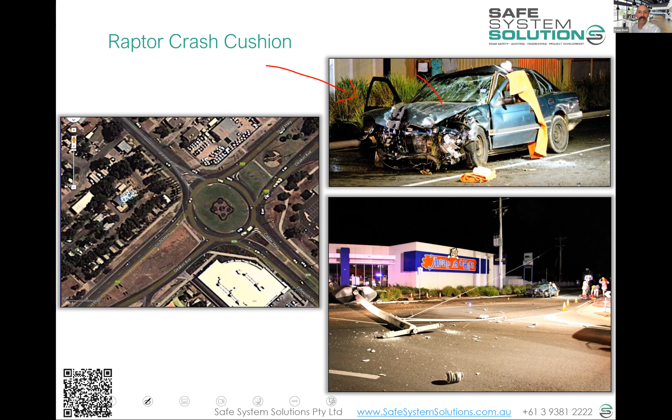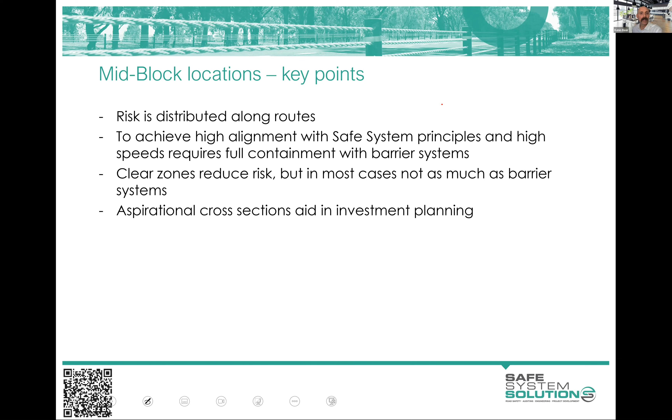So I don't think we'll do that quiz, Kathy. In the notes you can download there are some key mid-block points, because I think it's time to answer any questions. And Kathy, you can explain a little exercise which is all about reinforcing exposure, likelihood, and severity categorization.

Absolutely. Just a quick one before I jump in. The Raptor cushion, there's a question here from Peter saying wrong overlap. Not quite sure to what. You got that one?

Yeah, so I'm gonna have to go back and have a look at it. And while you're doing that, between wire rope and guardrail. Thanks, Peter. I don't know whether it is the wrong overlap or not. I mean, certainly barrier systems, like a W-beam barrier system, have a certain overlap. You don't want to get that wrong because it'll spear. I have to look into Raptors, whether it's the same.

Good question. So if we get into the specifics of barrier systems, we have barrier systems of varied flexibility. It used to be that we would say there were three categories of barrier systems: flexible, semi-rigid, and rigid. So rigid being concrete, semi-rigid being your type B or your G4 systems, depending on where you come from, your W-beam systems, and your flexible being your wire rope or a flexible W-beam system. So the newer ones, your Ramshield, Ezy-Guard style systems.

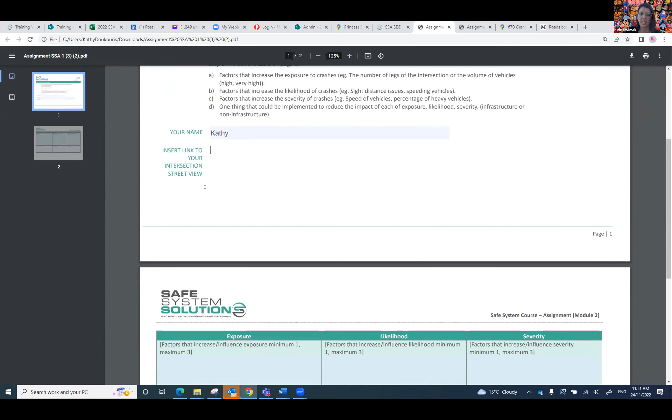So you pop in here your name, the link, so the Street View link to your particular intersection that you've chosen. So you can choose anything you'd like here. And we're not looking for a War and Peace type assignment. This is just so that we know that you have a good understanding of what is exposure, what is likelihood, what is severity. So we're looking for minimum of 1, maximum 3. So don't write any more. There's no more space for you to write any more in there.

Factors that influence exposure. Same for likelihood, and then severity, and then just one change that you could make, and there's no limit here. One change that you could make to reduce the impact of exposure, likelihood, and severity. Save that and then submit. Hold on. Oopsies. Yeah. And then we might get someone to run through theirs as an example at the start of next session.

And we won't be seeing Ken and his marvelous moustache there. We'll be seeing Max and probably his marvelous moustache instead.